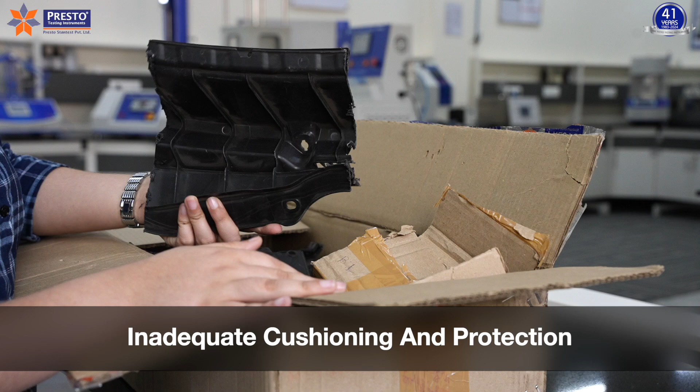Inadequate cushioning and protection. Insufficient cushioning and protection inside the box can increase the risk of damage to the contents. Without proper cushioning or void-fill materials, items may shift during transit, leading to impact damage or breakage. These are some common packaging challenges that may occur during shipping and transportation of products.

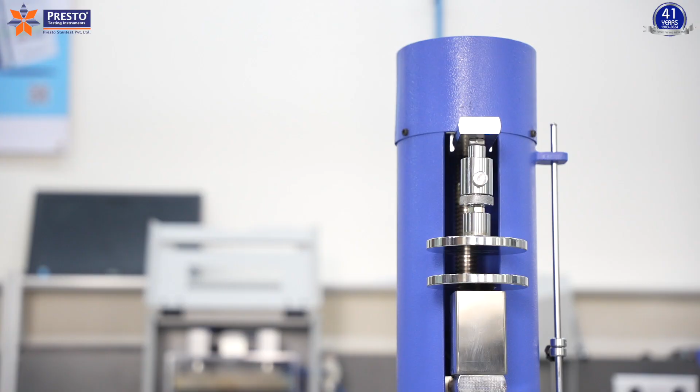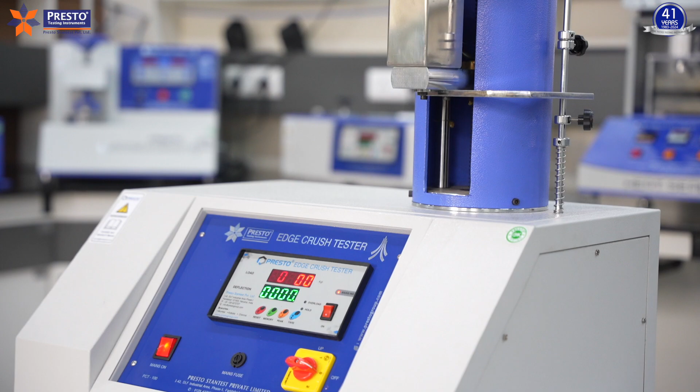Presto introduces a high-quality lab testing instrument known as the Edge Crush Tester. This quality testing instrument measures the crush strength of cardboard boxes and packaging containers. The Presto Edge Crush Tester works by subjecting corrugated fiberboard, a commonly used packaging material, to controlled pressure at its edges. This simulates real-world conditions, allowing manufacturers to assess the material's strength and durability.

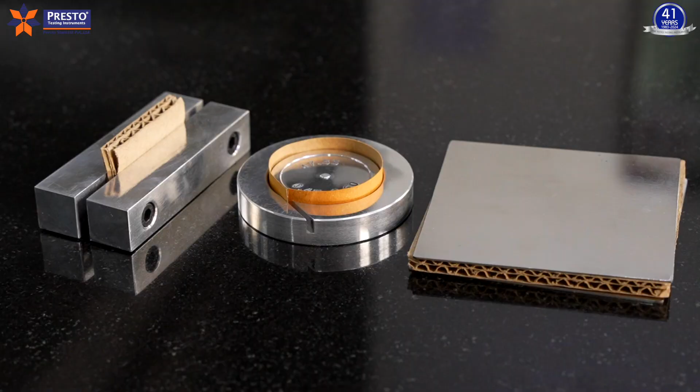To perform the Edge Crush test, place the Edge Crush test fixture with the erected edge of the specimen facing the lower compression plate. After placing the specimen correctly, press reset and tare to set the value at the peak load indicator to 0. After setting the 0 on the load indicator, turn the rotary switch to the up direction.

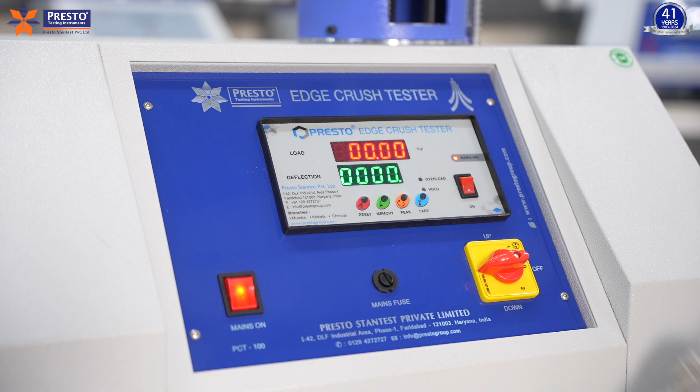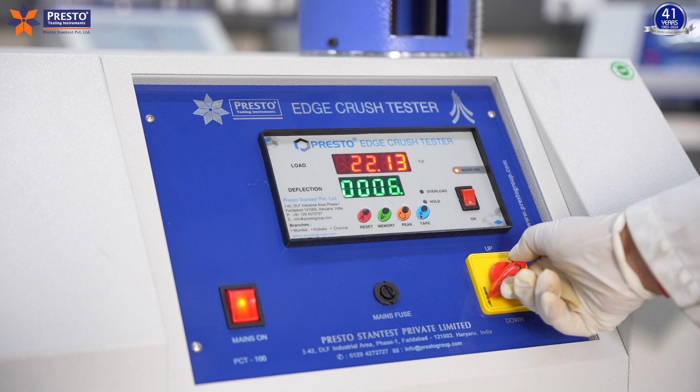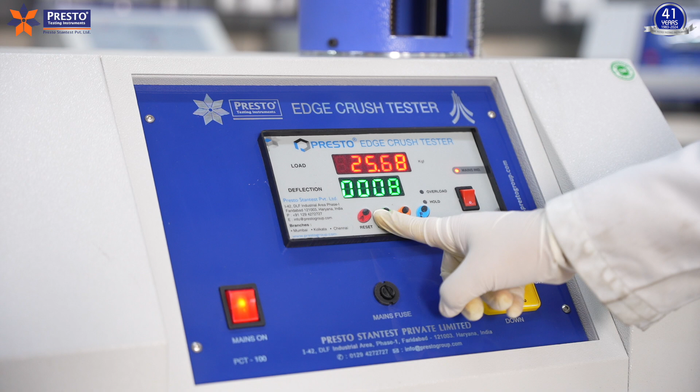This will move the lower compression plate in an upward direction, exerting a compressive load on the specimen. Once the machine stops, the display showing the load will return to 0 and the deflection display will freeze. Press the memory switch on the load indicator to show the peak value.

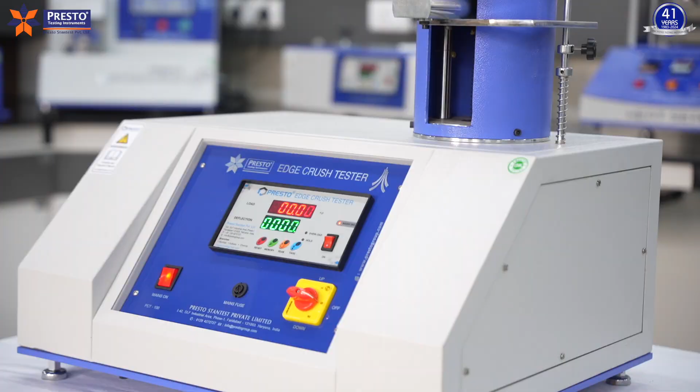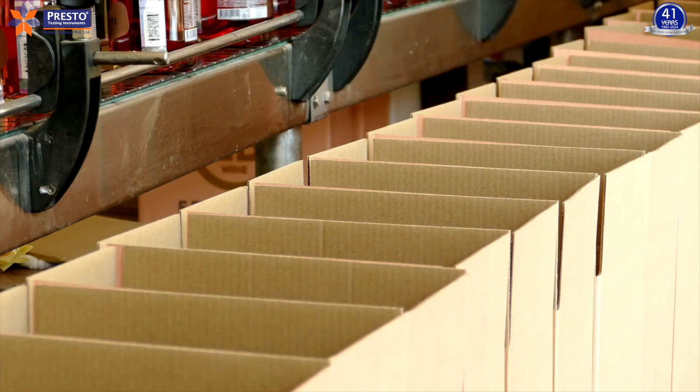Maintaining consistent packaging quality is essential for brand reputation and customer satisfaction. The Presto Edge Crush Tester enables us to implement robust quality control measures, ensuring that every package meets our stringent standards. Whether you're a small business looking to enhance packaging performance or a large manufacturer striving for operational excellence, the Presto Edge Crush Tester is your ultimate solution for overcoming packaging challenges and achieving packaging success.

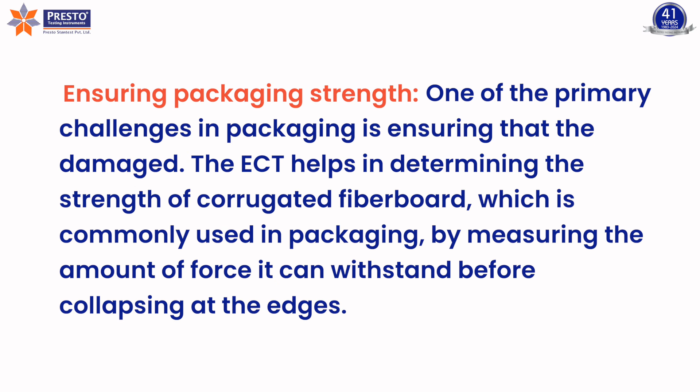Some common packaging challenges that an Edge Crush Tester can solve easily. Ensuring packaging strength. One of the primary challenges in packaging is ensuring that the products are not damaged. The ECT helps in determining the strength of corrugated fiberboard, which is commonly used in packaging, by measuring the amount of force it can withstand before collapsing at the edges.

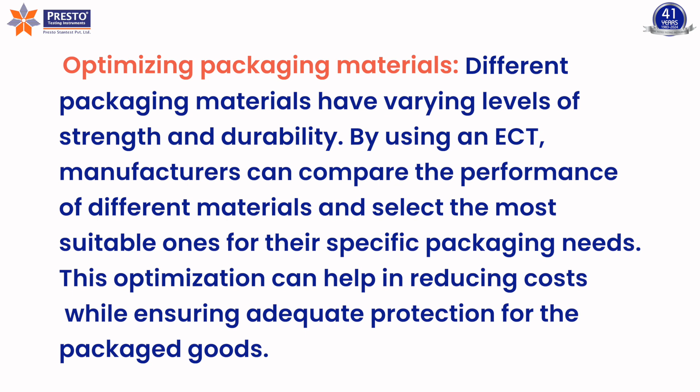Optimizing packaging materials. Different packaging materials have varying levels of strength and durability. By using an ECT, manufacturers can compare the performance of different materials and select the most suitable ones for their specific packaging needs. This optimization can help in reducing costs while ensuring adequate protection for the packaged goods.

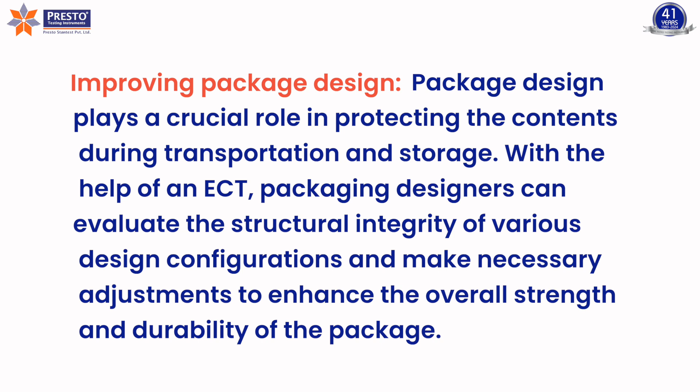Improving package design. Package design plays a crucial role in protecting the contents during transportation and storage. With the help of an ECT, packaging designers can evaluate the structural integrity of various design configurations and make necessary adjustments to enhance the overall strength and durability of the package.

Complying with regulatory standards. Packaging regulations and standards vary depending on the industry and geographic region. An ECT can help manufacturers ensure compliance with relevant standards by providing accurate and reliable data on the strength and performance of their packaging materials and designs.